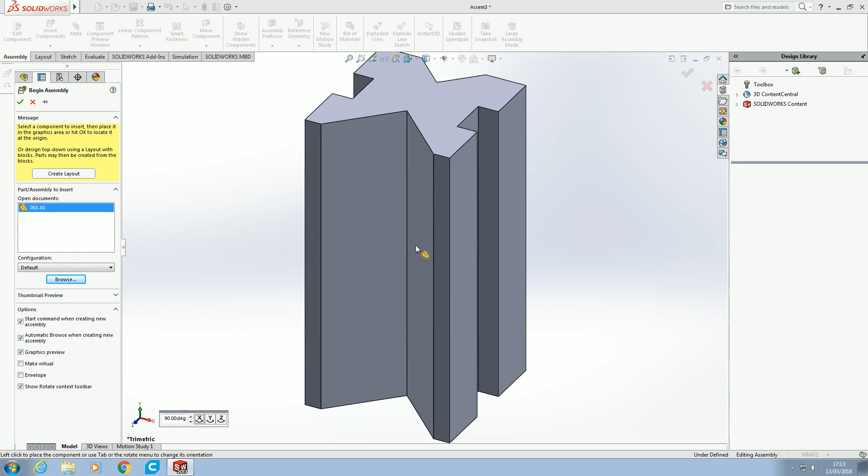You can see it, I can drop it wherever I want. We have some controls down the bottom here, because I've built mine the right way up in the modelling phase, so it looks right. If you selected the wrong plane to start with, it might look different, and all you have to do to move it around is use the controls at the bottom. You can set an angle and rotate it according to the XYZ plane. There you go, rotated back round.

Now I want this to be in the middle of my assembly, I want this to be the centre. You could try guessing where the middle is by dropping it, but if you just hit the tick, it will automatically drop it in the centre of the assembly, so all the planes should run through the middle. It doesn't really make a difference unless we get onto something really complex later, but it's always good practice to make sure everything's central round the origin.

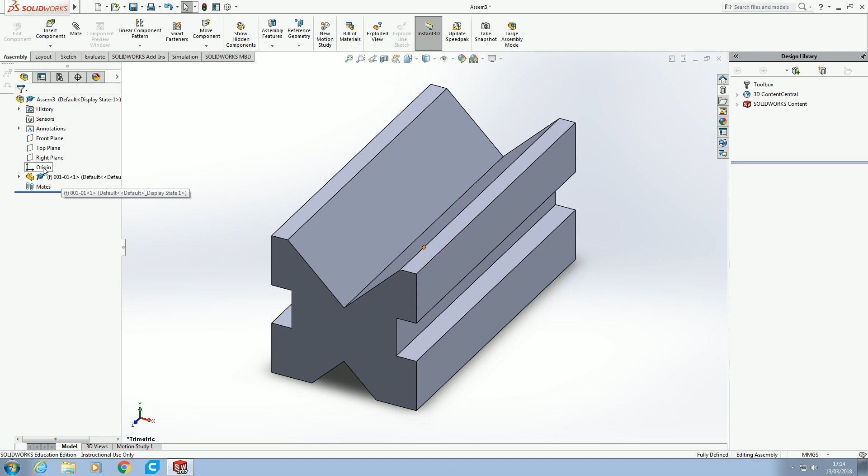So we've got our first bit. As I said, that's fixed, I can grab it but it doesn't really move anywhere, it's quite happy where it is. So next thing I want to do is insert the next part.

So we go up to the top here to assembly and insert components. Again, that opens up, you can browse for it unless it pops up automatically. Now next I'm going to want 001-02, which is the clamp for the inspection V-block. So open that up, there we go. So this is the part.

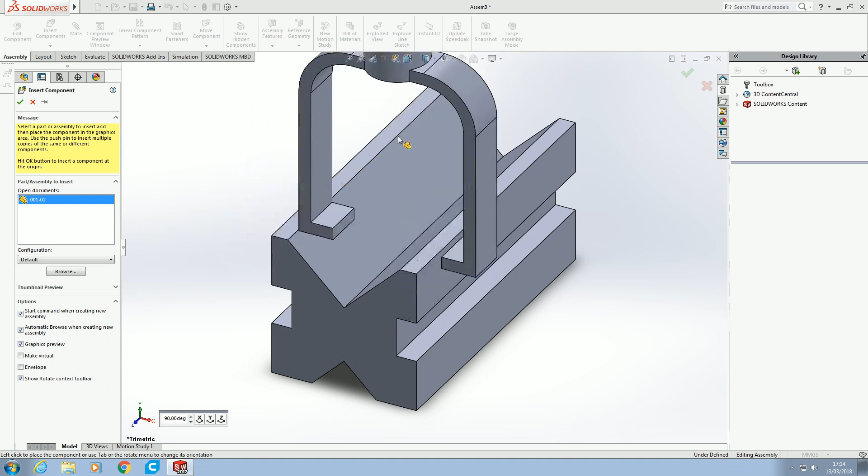Now again, I can rotate it round if I want to move it so it's facing the right way before I start, but as a general rule I just tend to drop it in. This one is now moving relative to the first one. I can sort of line it up about right like that. It looks right from there, looks right from there. Well, that's a pretty good guess.

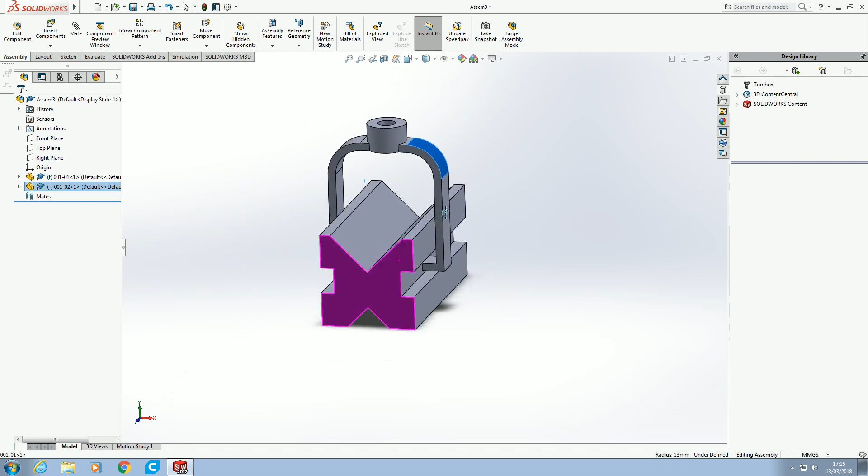But it's not fixed and it doesn't act like it would in real life. So what we really want to do is fix it into place. The way we do that in SolidWorks is using the mate tool. It controls two components and makes them relative to one another. So we click on mate, that should bring up a load of options.

There we go, this is the standard mate menu. The majority of mates we do are coincident. Occasionally we do perpendicular, tangent, concentric obviously for two round objects. So if we want them to be concentric circles with the same centre point, it's going to set to that one. Now SolidWorks is pretty good at automatically selecting the correct mate.

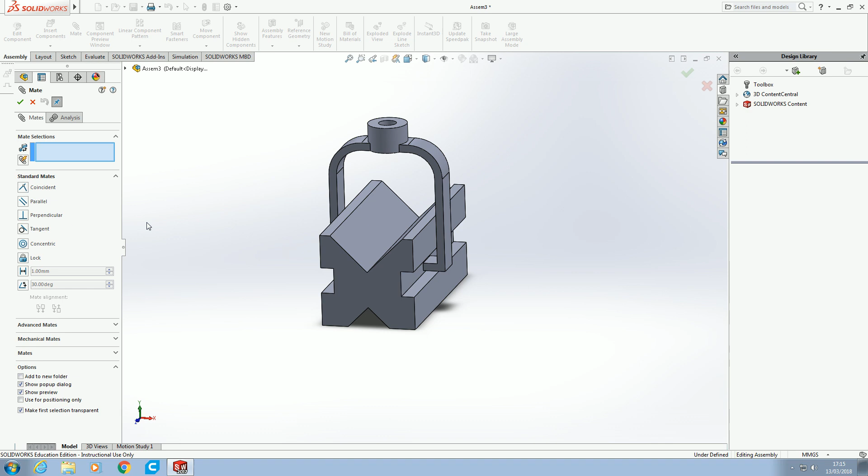So if you just select two surfaces, like I'm going to select the inside edge here, which makes this bit transparent since I've already selected that one, and then select this face here, it straight away does a coincident mate and knocks the two together. Now the problem with that is, although that could be technically right because it's touching up against there, there's then a big gap on the other side because of the way it's been laid out.

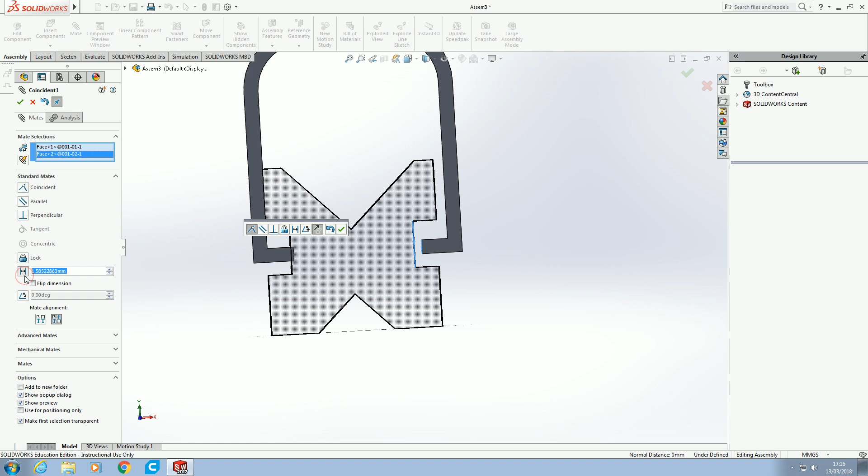So what we can do is use a different mate. We could use a distance mate like this one. If we do that, we can set a distance, so it's jumped back to where it was before. Now I know that the distance between the two is 0.5 millimeters, because then you've got half a mil on the right hand side and half a mil on the left hand side, so that's perfect. We can then tick that and it locks it in place.

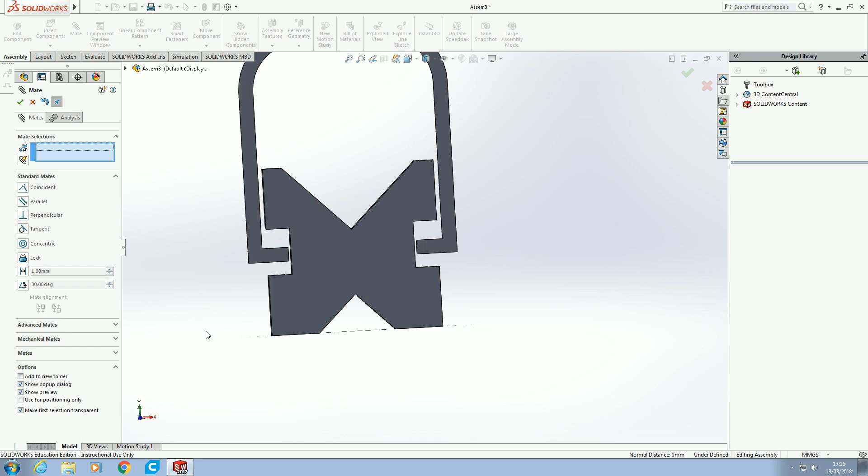Now because traditionally if you're doing mates you want to do more than one at a time, since one mate never actually fixes it completely - all that's done is stop it moving left to right on the screen, it still moves forwards and backwards. If we look at it from the front, yeah, we can't actually move that left to right anymore.

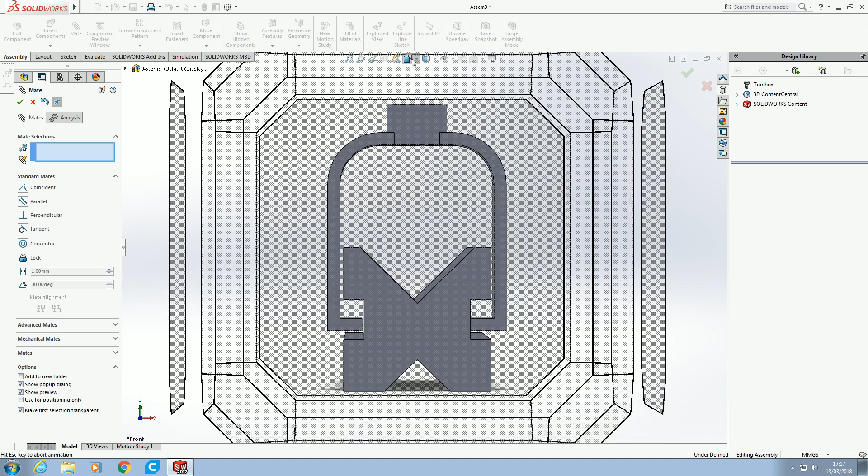We can still move it up and down, but it doesn't move left to right. And if we look at it from the side, it'll still move this way, it'll still move this way. So it's not fully defined yet, and obviously what we want is a fully defined thing.

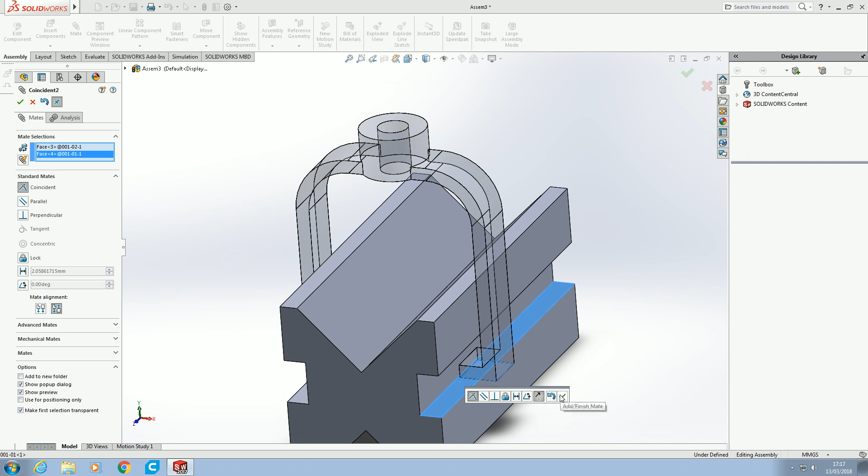Now, because of gravity, I'm going to say that this face is going to sit on this ledge, because that's naturally where it would rest. Once there's a component in there, it would pull up against the top, but we're not putting a component in, we're just looking at how it assembles together. So we're just going to say that's going to sit on there. That gets rid of the up and down movement, so now it only moves forwards and backwards.

Now, we could in theory put this anywhere along there, because technically this is correct, isn't it? But I like to put it in the middle, because I think that looks neatest, so I always say it's best practice. Putting it in the middle, we could do a distance mate like we did with the inside leg, but to be honest, it's a bit complicated and a bit of a pain. So why don't we use SolidWorks to do the work for us? If we go to Advanced Mates...

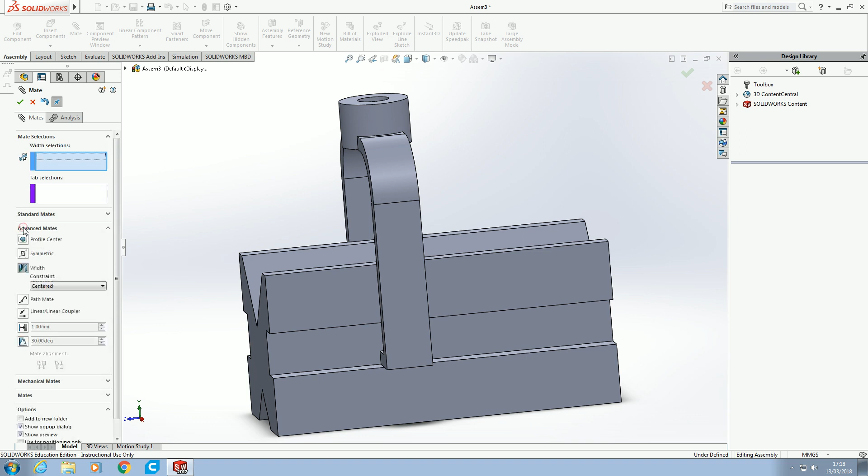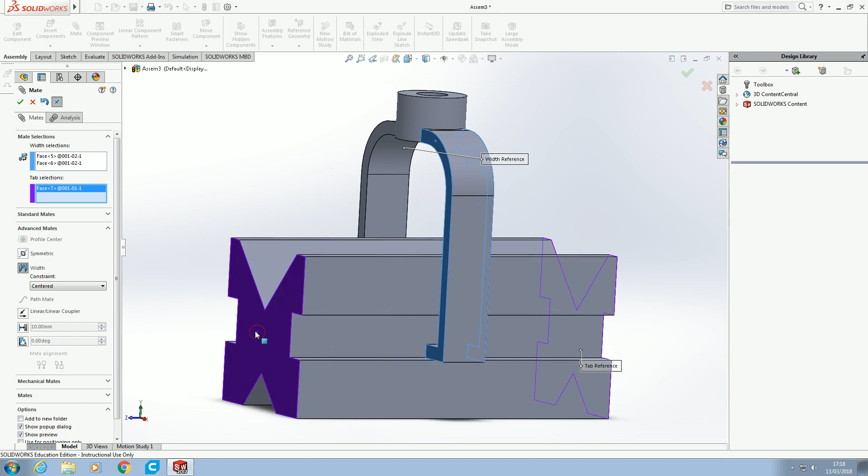What we've got in here is one called Width, and what this basically does is it works out where the middles are. So for width selection, first off I'm going to select one side of this clamp and then select the other side of this clamp, so that's specified that as the blue bit. Tab selections, so the bits that I want it to be in the middle of - I'm going to select one end of the base and then the other end of the base. And that's actually moved it straight to the middle, so it's worked out where the difference is and it's done it to the centered point, as it says right here. Then again you just need to tick it.

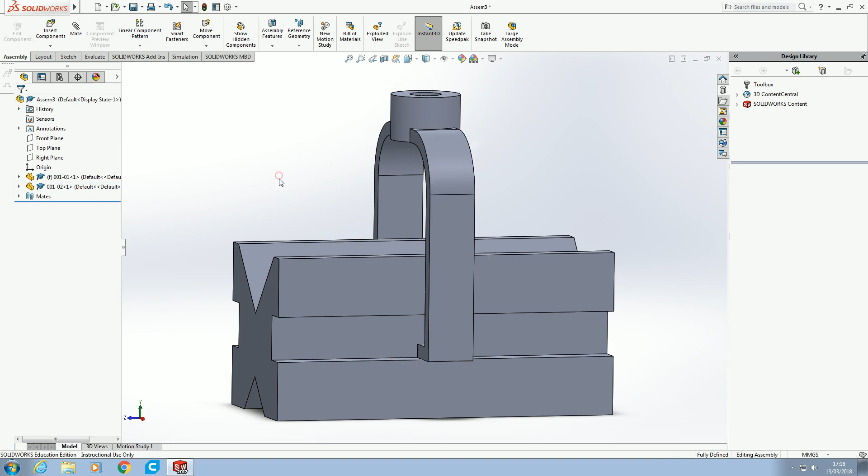And it's done. Now I can tick it again just to get rid of it. And we can see there that's now fully locked - it's not going anywhere, it doesn't matter what I do with my mouse, it's not going to move. So that's a fully defined part, as it says down the bottom.

Now last bit is we want to obviously insert our screw, which is going to be 001-03. And again, I didn't rotate it around before I started - hopefully that will allow me to do this. So we're going to mate.

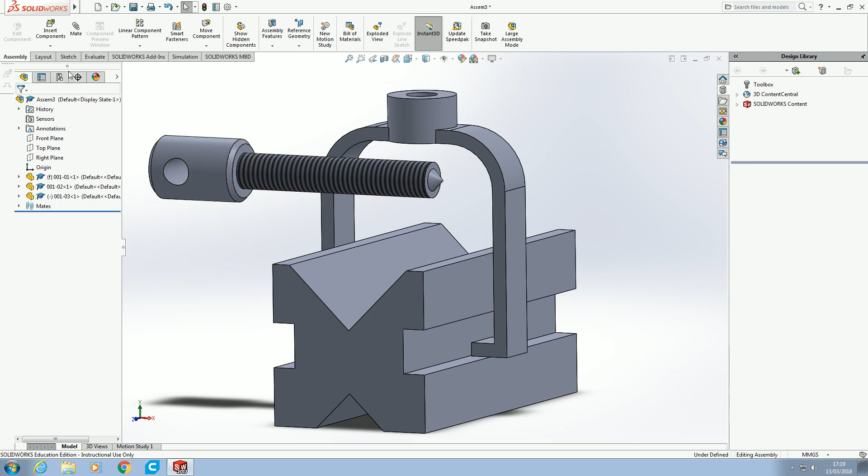Now obviously this screws in through the top of the clamp, so we click on this shaft, we click on the hole. There we go - that hasn't done the thing I needed to do, never mind. Right, so it's popped it up there. We can see quite clearly it's concentric.

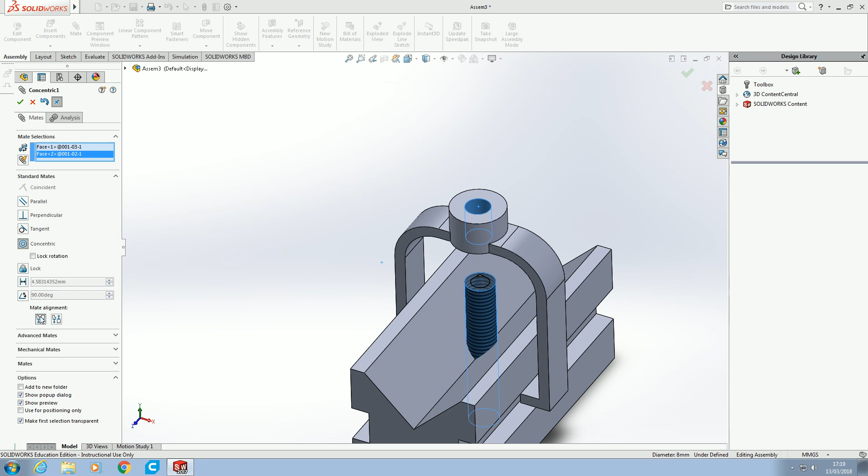Now what some of you may find at certain points is it goes the wrong way round, so what I'm going to show you is this mate alignment button here. If we just click it, you see it turns it over - so it's still kept the same mate, but the part's the other way up. Now if it had done this originally, I'd be telling you to click the button to swap it back over, because sometimes you want it the other way up. So it's just there if you need it. It's obviously selected concentric, which is perfect, so let's OK that.

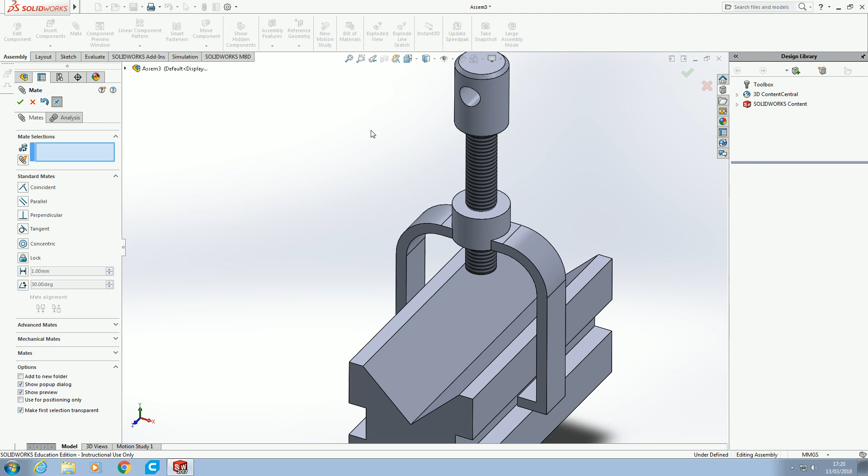Now again, this thing should screw up and down. There is a mechanical mate for doing screws - we will talk about that in a later tutorial because it's not essential for this, when we go into moving parts and assemblies and such like. Now we could mate it so it's flush all the way down, but the problem with that, of course, is it then interferes with the body, which is no good. So we're going to want to put it up a little bit.

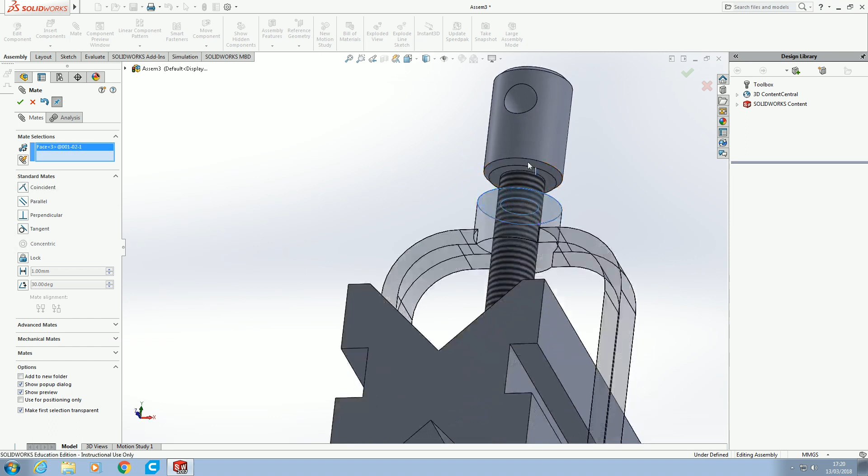I'm probably reckoning somewhere around there. So what I'm going to do is mate the top of the clamp with the bottom of the screw. Now again, as I said, it's automatically jumped to coincident because that's what it thinks you want, but we know it doesn't fit. So we're going to go back over and do a distance mate. I had it set about 5 before, so let's just round it to 5 so it's a whole number, and then tick it.

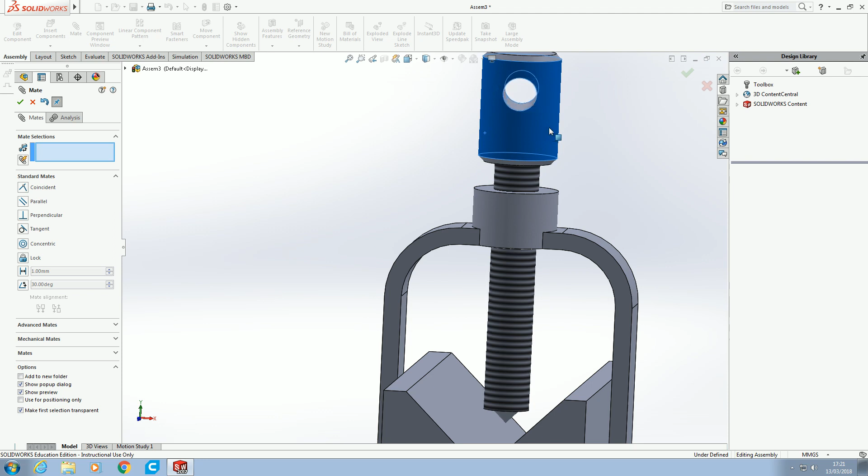Okay, that's good, that looks nice and neat. There's a little bit of a gap both sides so we can see it. Now the last thing, obviously, is that this still rotates. That's not a great problem, but it just won't look good in the technical drawings because it'll always be at a slight squiff angle, won't line up - it means we'll end up with lots of hidden detail lines and extra lines we don't want.

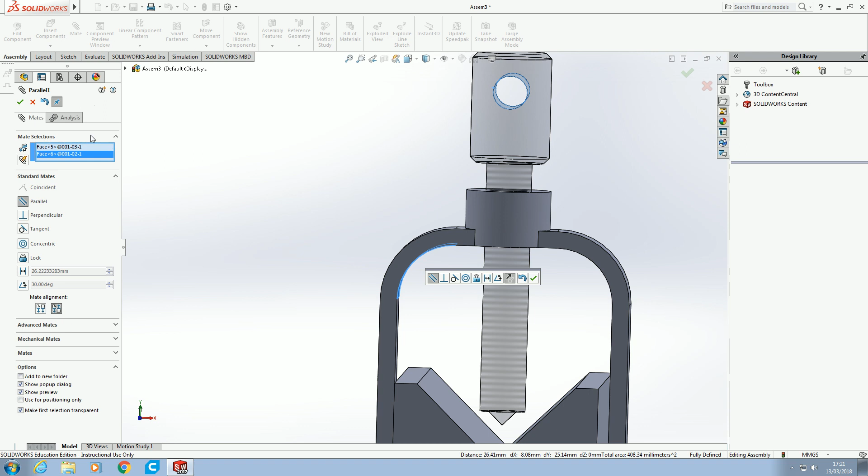So what I'm going to do is align that hole with the inside of that curve, because it's going to make those concentric, so they have the same center point, they're facing the same direction. It also does it with parallel, which is quite good. And we're going to tick that, tick it, there we go, and that is our assembly fully defined.

So we can just stick it up in the isometric view, see what's going on, there we go. So that's our fully defined, fully assembled inspection V-block. That's the level we were expecting to get to - you've got to get all your parts in, get it all fully defined so that it has a set and that's where it should be.